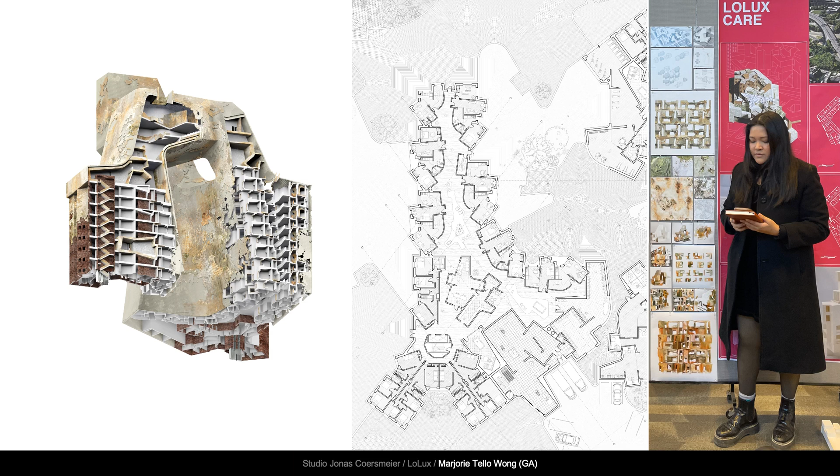The studio is called LoLux Care. LoLux stands for low income, high luxury urban housing. CARE stands for an integrated housing community that provides homes and services for children that are cared for by people who are not their biological parents. So both terms, LoLux and CARE, point to the social and economic dimension in urban housing.

We discuss these issues in the context of an acute housing crisis in New York City, one that has been pushed to the breaking point by the pandemic. And we discuss how these issues relate to the architectural mandate. LoLux has been the general term we've been using for our housing studios for the past 10 years. Every year there's a different focus. This year it is foster children, LoLux Care.

But generally as a disciplinary project, LoLux discusses socio-economic and political issues in urban housing and takes the position that architecture holds the potential for improving human coexistence in a more just society. Simply said, it assumes that we can actually make a difference.

We are grateful that the events of the past few years have mobilized the architectural community to focus once more on issues of equity and inclusion. Our studio addresses equity and inclusion in two ways. First, we develop models of overcoming internal segregation in urban housing, the separation of less well-off tenants from wealthy user groups.

New York City provides incentives for developers to include affordable housing units in every new construction. However, these pro forma inclusions often lead to socially questionable results. The internal building organization often separates high and low income occupants, creates essentially a rich door and a poor door. We seek to overcome this form of internal segregation by proposing a model of spatial and organizational integration.

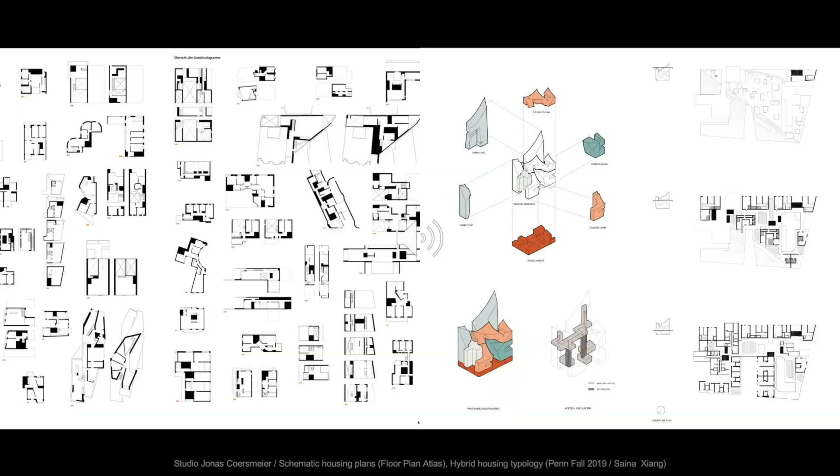We develop hybrid typologies for low-income and luxury housing. The LoLux Studio promotes urban housing as a space for communication, a place for informal and coincidental encounters that will foster integration and present a new kind of urban living for a diverse group of New Yorkers.

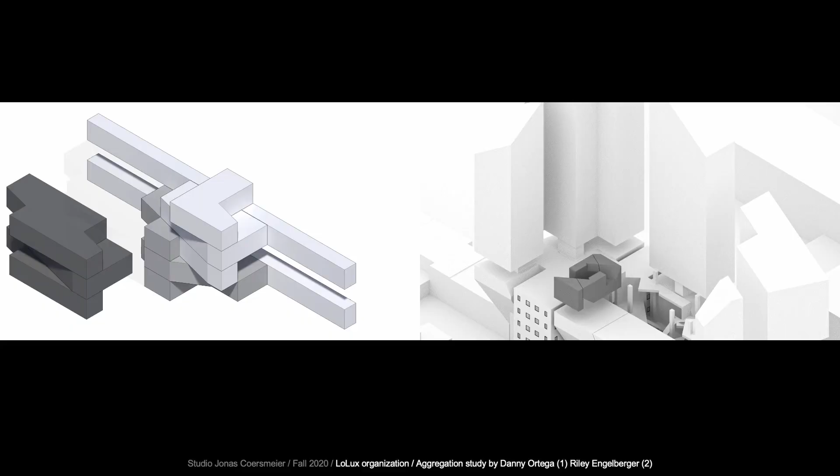The exact definition of low and lux will be project-specific. For example, a project might redefine the notion of luxury as a measure of spatial quality or communal integration rather than an expanse of floor area. This year we are considering foster children and their caregivers as a community to serve with our proposals. Here integration refers to both the socio-economic condition as well as the diversity in living forms and housing types.

The second level at which the studio addresses equity and inclusion is to propose a public common space, the space that provides open and equitable access to essential urban resources for the community at large. This year, CARE proposes social services including physical and mental health care and specialized services for children and the elderly.

The nuclear family isn't dead, but it has a lot of competition these days. Cliff Pearson writes this in his article, New Domesticities and New Realities, in the fantastic book Under Pressure, which I recommend to everybody. He writes that 30 years ago, 40% of US households lived in a traditional family unit. Today, it's only 24%. Singles rose from 16 to 26% since then, and the category of other families jumped 10 to 15%. We are interested in the other families.

We're discussing the history of foster care and contemporary models of what used to be called orphanages, including group homes and new models for foster care. LoLux Care proposes an integrated housing community that serves foster children, children that await to be placed in foster care, and young adults who have experienced foster care in the past.

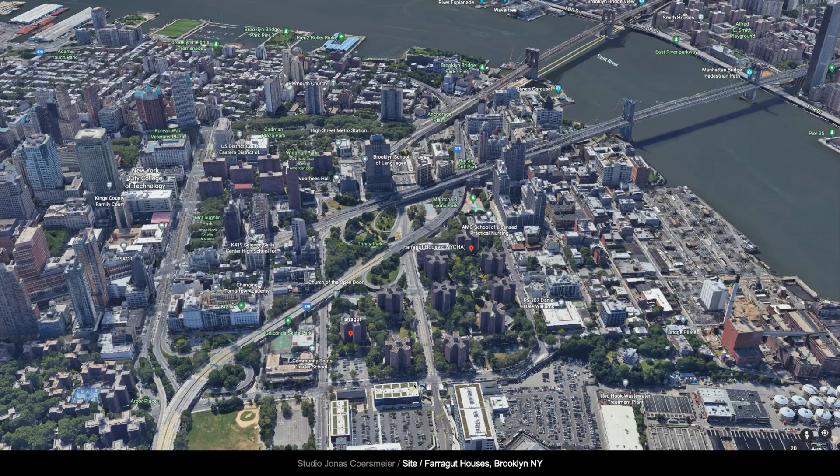To the right, we see the East River with Manhattan and the Brooklyn Bridge embracing Dumbo, and to the right of our site, the quaint neighborhood of Vinegar Hill. The Farragut houses are separated from the rest of Brooklyn by the BQE, the Brooklyn-Queens Expressway, making the area relatively hard to access from the south. The effects of separating and isolating neighborhoods is apparent.

The poverty-stricken area of Farragut stands in sharp contrast to the nearby blocks in Dumbo and Vinegar Hill, where the median income is $200,000 a year and apartments sell for over $1 million. We identify the Brooklyn-Queens Expressway as an instrument of displacement and segregation.

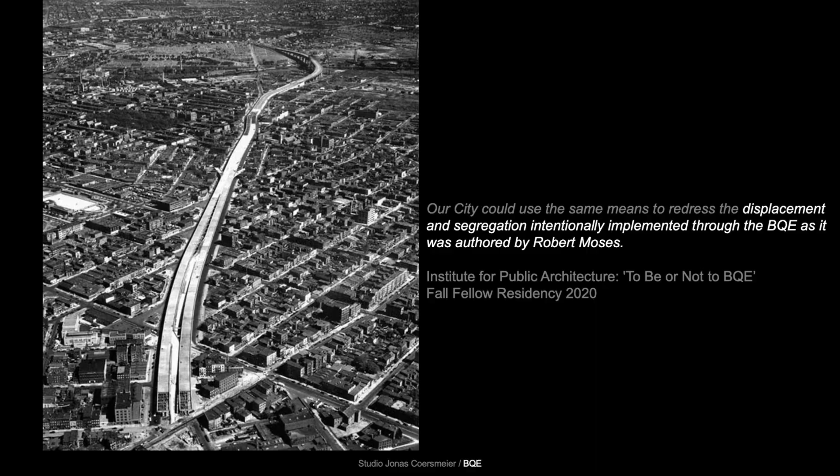Students may consider or propose alternative future scenarios for the urban roadway, including those that could reconnect and potentially heal the urban tissue. The problem of inner-city highways and how they have reinforced racial divides is not at all unique to New York City. Many cities in the country and around the world are actively planning to reconnect neighborhoods through highway augmentation or removal.

The 10 buildings of the Farragut Housing Estate were built in the early 1950s and are managed by the New York City Housing Authority, NYCHA. The studio considers them a prototypical public housing project with its common challenges and opportunities as they pertain to connectivity, amenity, and land value. With this, the studio considers Farragut houses as a study site for urban densification.

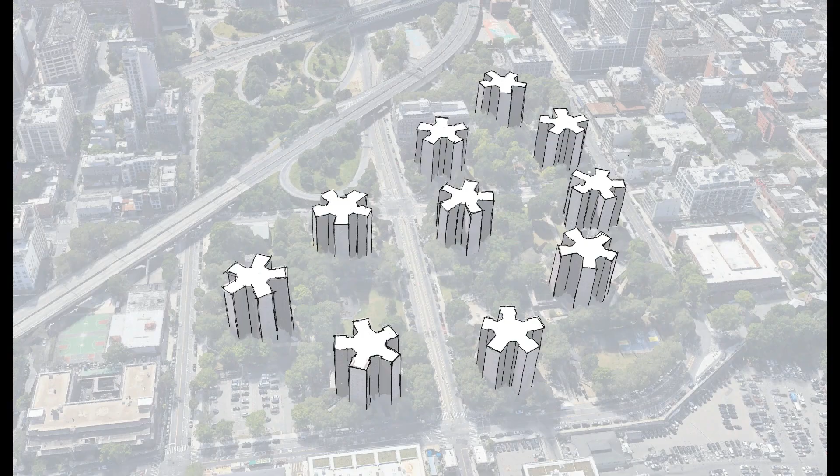During the first weeks of the semester, students will develop schematic urban proposals to densify the Farragut housing site. This is certainly a site that requires an urban approach first, and it's a huge site. In order to make this very easy for students and a fun start of the semester, we lay out a catalog of urban massing strategies that students can choose from and quickly test hybrid strategies.

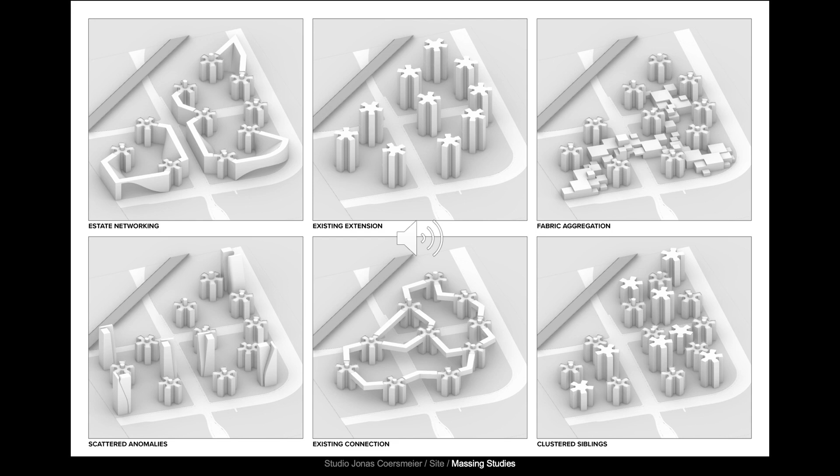Here we see examples of hybridizing these strategies. Combinatory logic such as networking and adding solitaires, or extending existing towers and adding infill towers. We conduct a series of massing studies that address the relationship between building form and housing type.

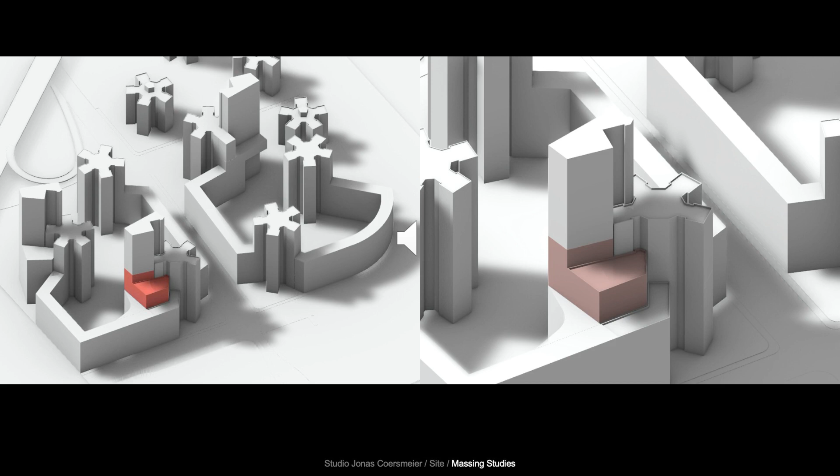Within your very own urban scheme, you will specify a focus site of just 50,000 square feet of integrated housing. So, for example, here we see on the top left the global urban massing scheme, and then on the right side the actual focus area that will be architecturally dealt with. You will be given plenty of material to understand and then to work with the existing building structure.

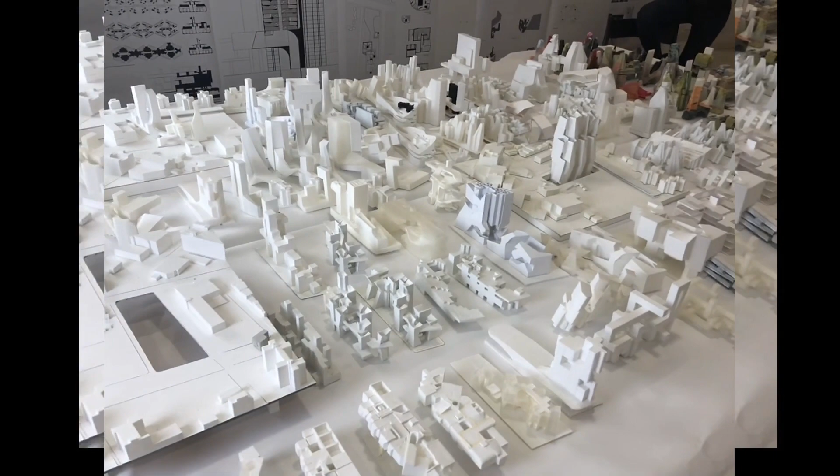The studio discusses critically the notion of context without relying on past conventions of contextualism. Here you see some massing models of previous LoLux studios. They study modes of densification that are invested in the autonomous reality of the city. Interventions are assessed by the qualities that they produce, the urban qualities, not merely by the degree to which they sustain the city's current condition.

New forms of densification are driven as much by the urgent necessity to create space and resilient structures for habitation, as by the desire for density itself, an inherently urban quality.

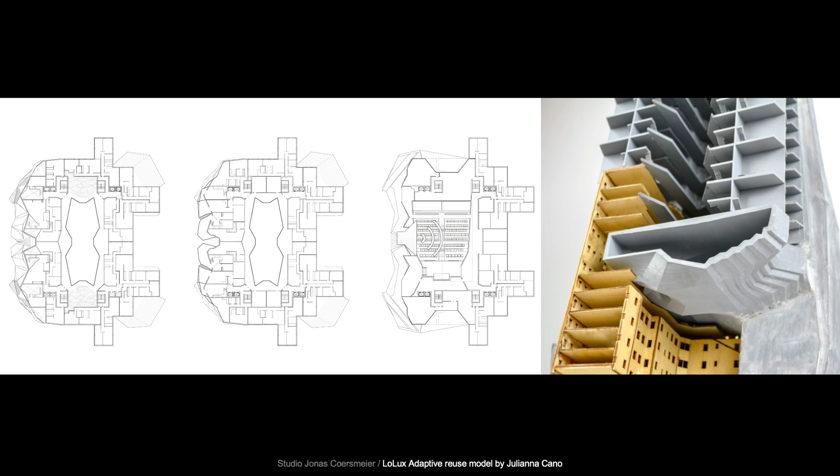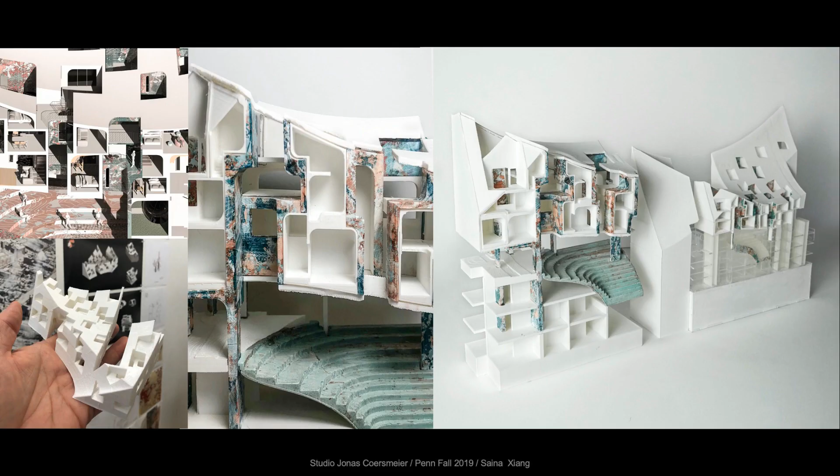How does one adapt post-war public housing developments, known colloquially and often pejoratively as projects, to a drastically changing socio-economic environment with new demands and desires for amenities, access, and public space? What are economic models that allow for such transformation in times of no political will or funding for public housing development? And how does one inspire through design a positive identity for stigmatized old structures of this kind?

The studio takes a proactive approach to the idea of adaptive reuse and allows for radical urban and architectural interventions, which is forward-looking as it creates an actual new life cycle for the existing building structure.

The studio introduces the idea of material urbanism, which offers a method and a disciplinary position as it refers to the materiality of the urban condition itself. It encourages deep material exploration and gives agency to material behaviors and physical models. The projects are based on organizational and aesthetic principles found in the study of emergent material expression.

6 years ago, we introduced photogrammetry as a tool for just this transposition. Here we see an example of an intentional mismapping of the photogrammetry material. The studio had also introduced 3D print casting, an exciting technique that we're continuing this semester as well. A couple of material massing examples here.

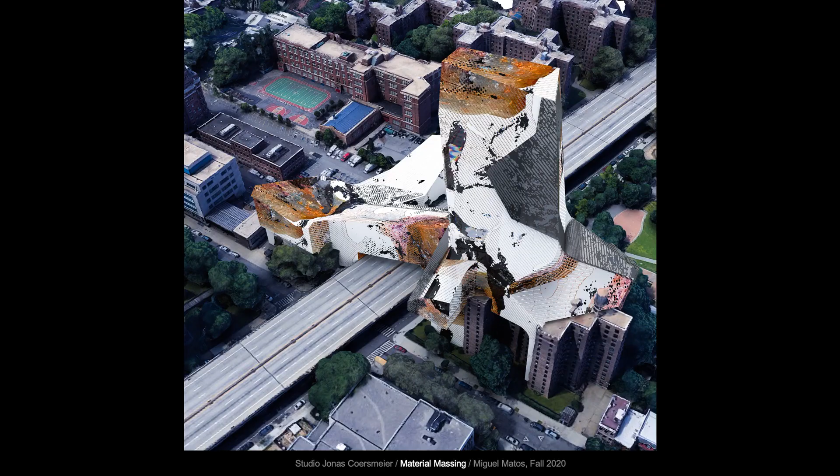Examples of speculative mediation between physical and digital material, with material alchemy playing an active part in the process. Material mathematical models, giving agency to both the material and the algorithm. Purely digital material transfer here, early GANs.

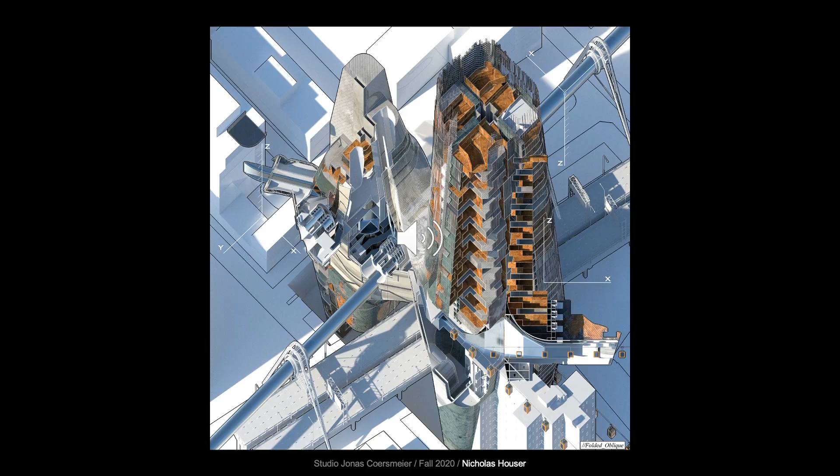And to go through the final slides here with examples of previous years very quickly. Here you see a very small excerpt of our typological studies engaging the latest AI. A rather advanced hybridization routine that is based on a thorough understanding of the primary housing mechanics, which you will be taught in the first weeks of the semester. The parent plans of this AI.

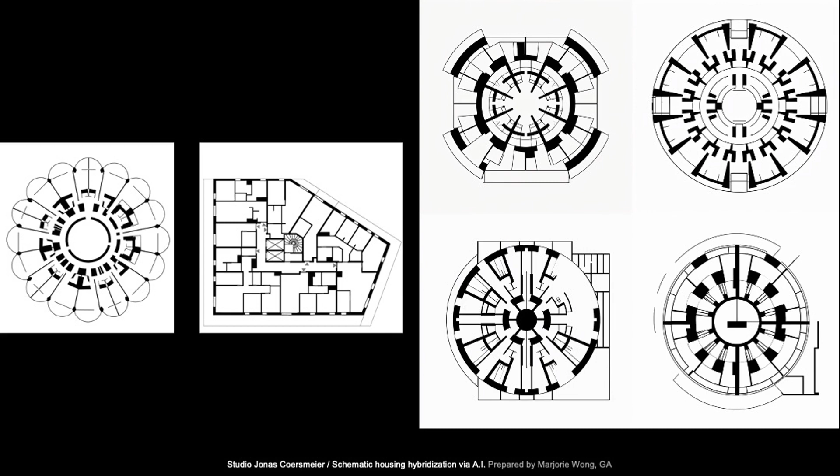Example on the left, Bertrand Goldberg, Marina City and Comte and Vollenweider House in Paris. And four AI options for refinement on the right. These first examples here all operate at the scale of a building plan.

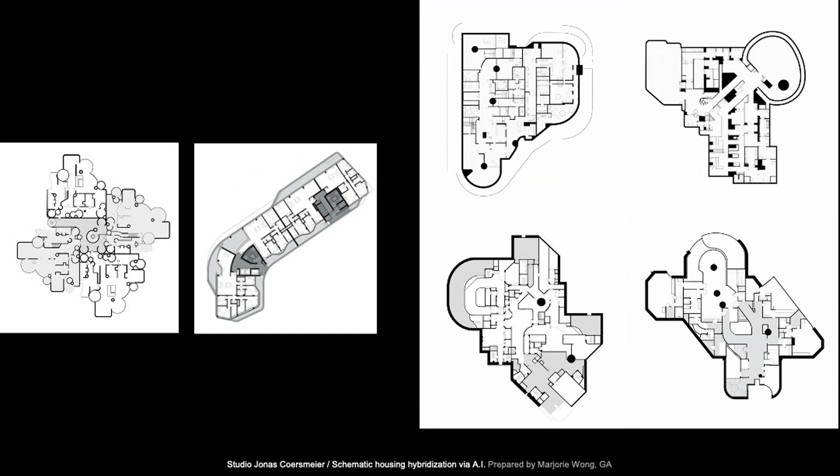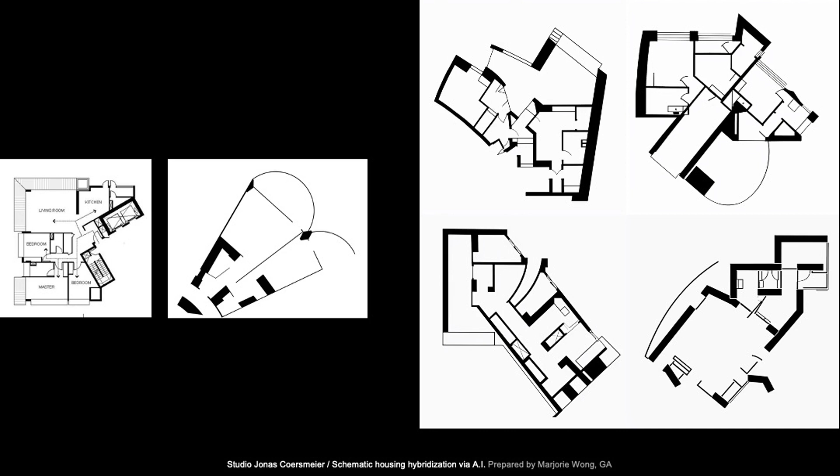And here an example at the scale of the housing unit. All these scales, urban context and massing, building type and apartment, are entirely interdependent and also deserve individual analysis.